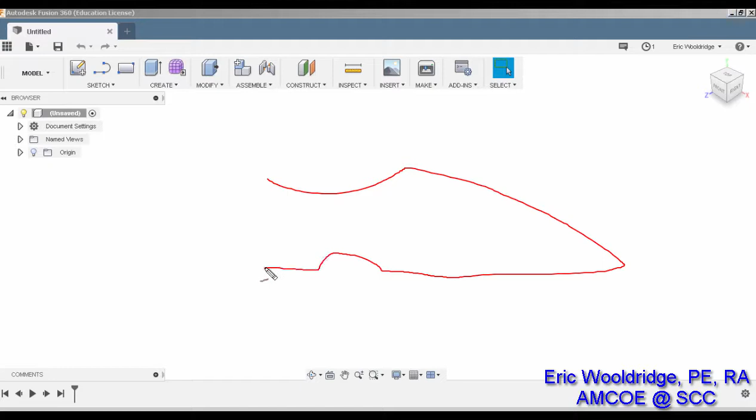Now we could try to scan it and that kind of thing, but I want to show you some tricks with the process and give you a feel, just in case you're having a hard time visualizing what I'm going for. If you just imagine, this is going to be a horrible example, but a lady's shoe kind of thing, a piece that we're probably more like that.

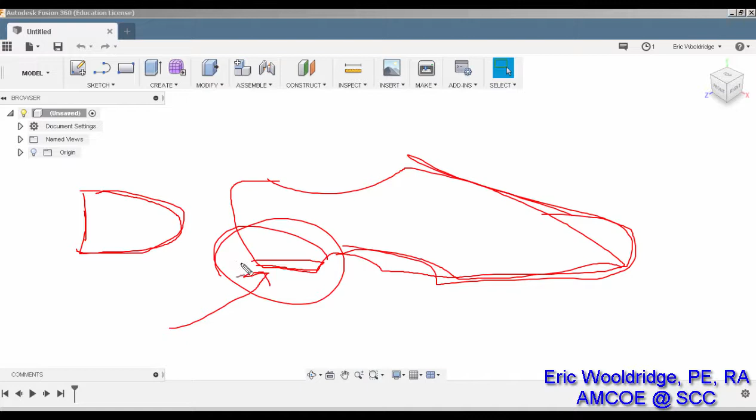I don't know, you know what I'm going for. Anyway, we're doing this right here. That's the piece that we need to replicate, and it looks like I've traced it out on a piece of paper. It looks kind of like this, with some thickness. So that's what we're going to make.

I'll hit escape there. The first thing we're going to do is start a sketch. Now I've traced over here, so I'm going to create my new sketch first, and I'll start with the top plane. I'm going to insert... let me see if I can just do a copy paste.

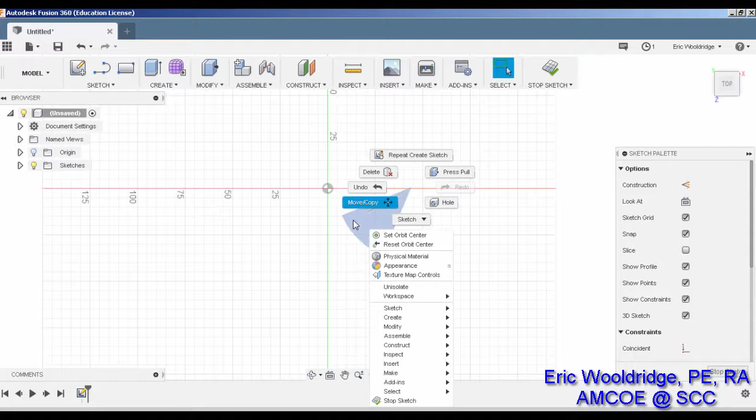No. I'll do insert instead. So let me insert the image in by going to insert, attach to canvas, selecting the face. It's going to be that face, and I'm going to select the image. Alright, got it selected. And now you can see the image right there.

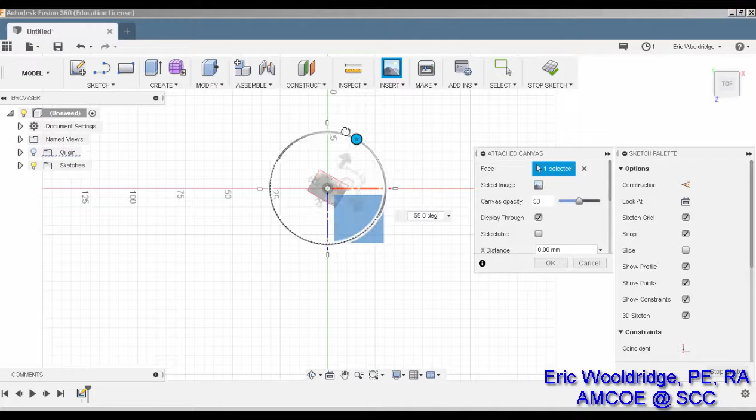I'm going to go ahead and rotate it because I want to draw it this way. And the question is scaling. So we'll zoom in first so you can see the image. I went ahead and took a measurement and drew a line that is this.

I don't want it being that hard to see. Alright, I drew a line from here to here, and I actually measured it with a digital caliper. It's 22.42 millimeters. So my objective is to scale this thing in such a way that that's a true version of that.

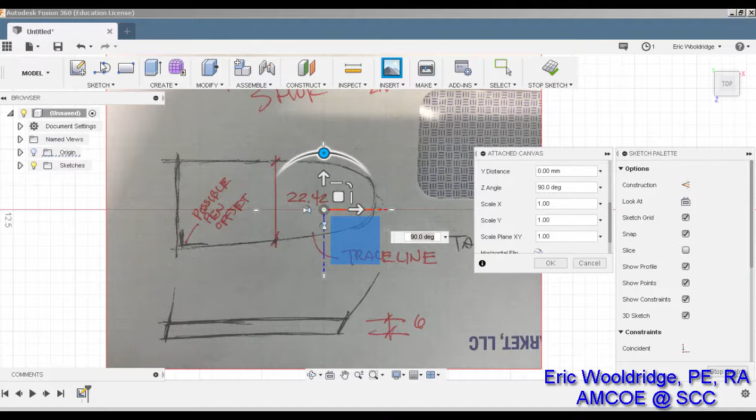And this is a little bit of the trickier part, figuring out what kind of scale factor we're going to have. So first thing I'm going to do is come over here and draw a line that is in fact 22.42.

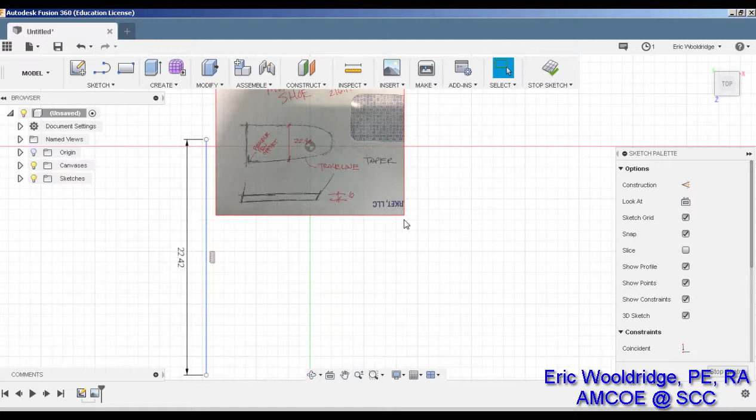And to do that, of course, I lost my line there. To do that, we have to go back to edit feature. So let me click that off for a second. To reorient this, it's not going to give you a lot of options by clicking on it, but you can go down to the picture itself, the canvas, right click and say edit feature, and there you go.

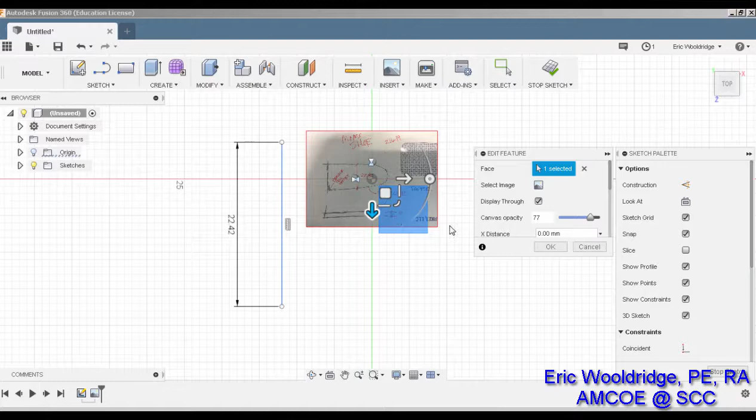So I could keep working on it a little bit. This is your scaling ability right here. And I could get in the ballpark. I am going to kind of drag it, and our objective is to scale it in such a way that line matches up with that other line.

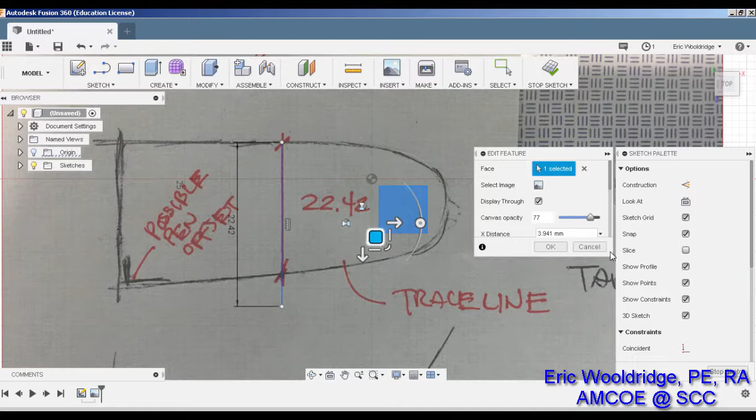It's not an exact science. We can probably get pretty close. We can see as we do this process that... let's see if it's adjusting my scale factors for me. Nah, not much. Keep going.

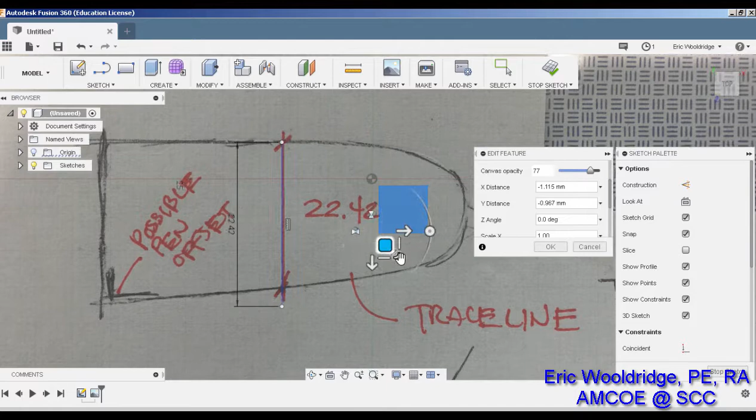You can see I'm really close now. Let's go just a hair back. I'm going to get as close as I can. I probably can get this manually fairly close.

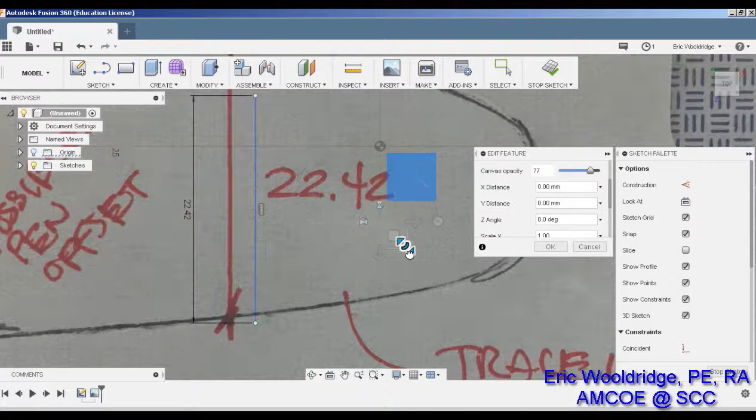That's really close right there. See that? My line is about the same length as that, so that's a quick way to scale it. Now if I knew a real scale factor I could type that in and be done, but this is the quick way I found to do it, and it's the right size.

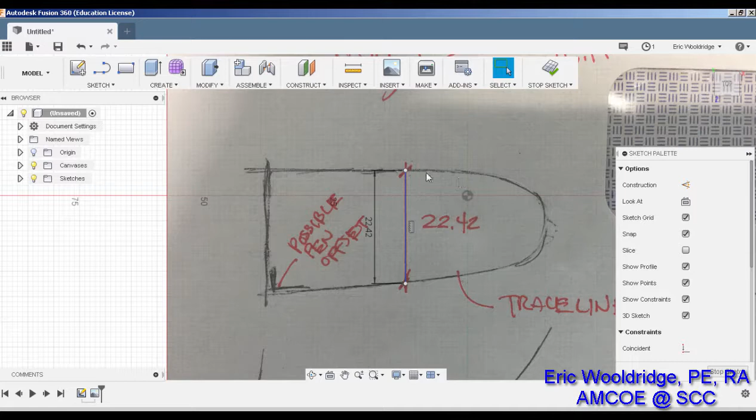So now that I have it scaled to the true size of what the image shows, my next step is just to trace this particular feature. I can do this with a combination of tools, but I've got to watch my grids, since they'll interfere with this process if I'm not careful.

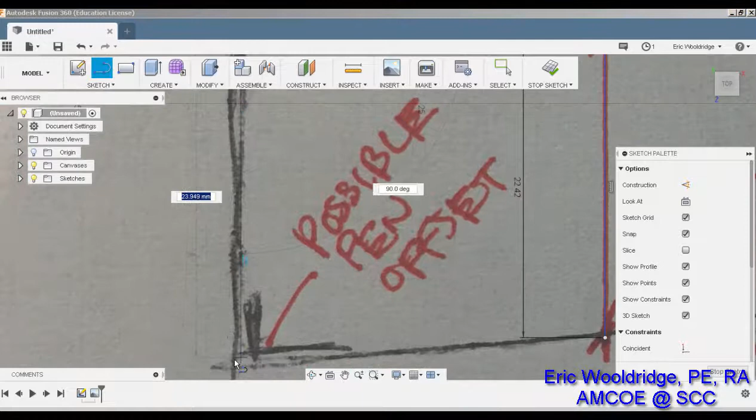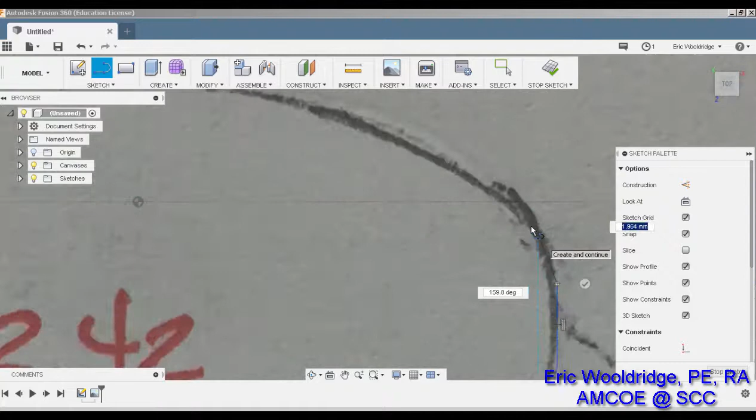And this isn't going to be an exact science in recreating this either. We're going to use some lines to make this work, and I have to click carefully and slowly, making sure I'm watching my curves. I could have used an arc here, but honestly if you just draw small enough, you'll create the curvature you need.

Close it. And there's the shape. Now I will note this.

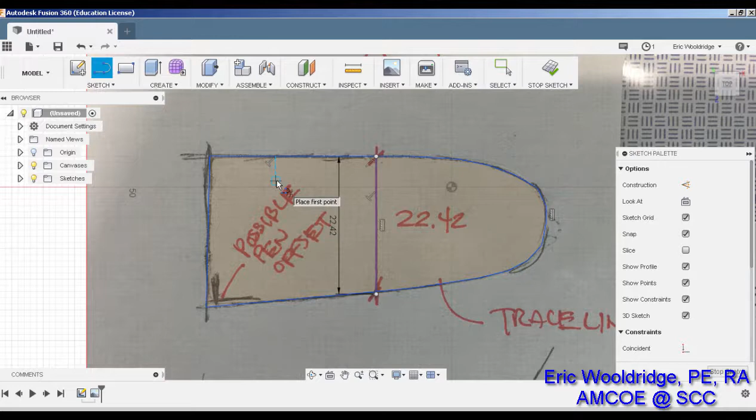See this image right here? It's noting the fact that when I was marking or tracing this with a pen, there's a slight pen offset. So I made a note to myself that this might be the actual pen offset, and I'm going to work with that, assuming I'm probably slightly off.

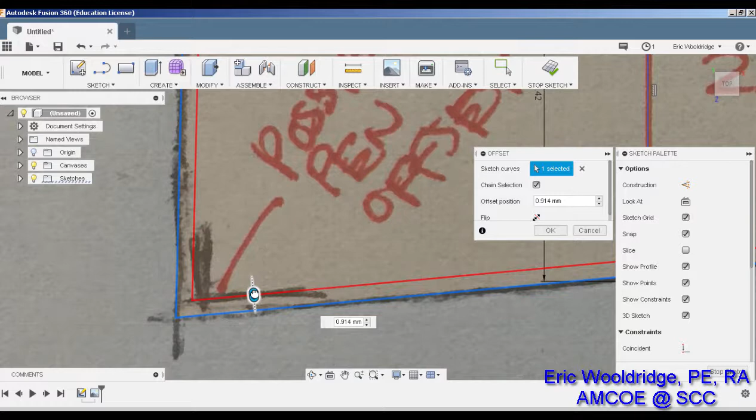So because of the pen's size, I'll hit offset, click my edge, and pull it in until it's about lining up with that. That's pretty close. There's no perfection here because we're just recreating an object based on what we have—it doesn't have to be perfect.

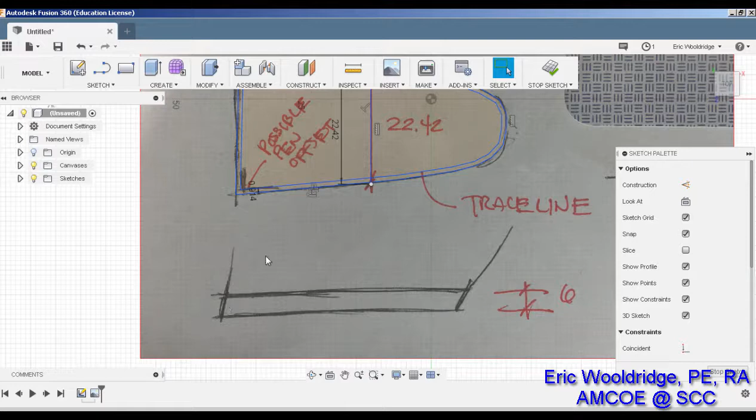So anyway, I now have my extrusion. You'll notice in the sketch I point out that this thing is going to be about 6 millimeters tall, and it's slightly tapered—it's going to taper uphill a little bit too. So I may have to account for that as well, but we'll see.

Let's try it first. I'm going to hit stop sketch, hit create, click the inside zone, choose new body, and we're going to select a taper. We want it to flare out, so I'll do like a -15 with a distance of 6. Let's see how that's starting to look.

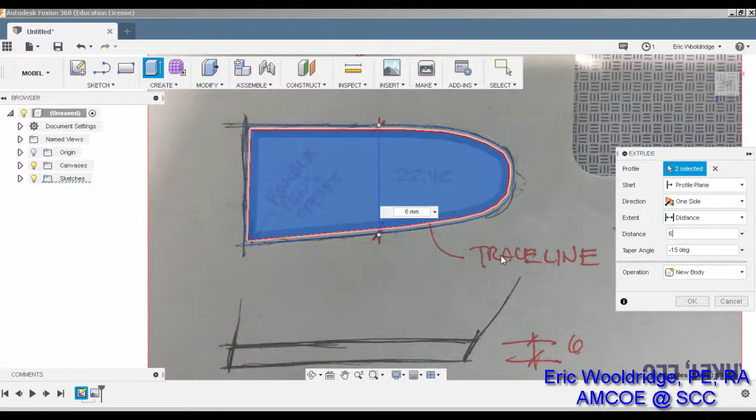Maybe I need to go the other direction—plus 15—and it's got a little bit of flare to it. That's not too bad. Let me look at it that way.

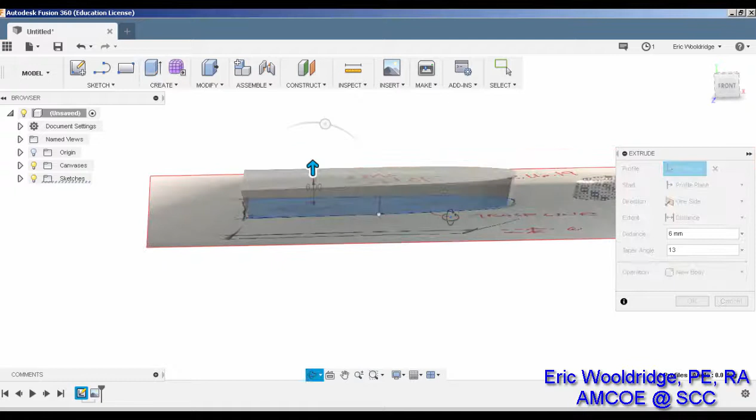I may play it even safer. I could taper it a little bit less by changing it down to 13. Still got a little bit of taper, not bad. So you can see what that taper does—as it extrudes, it tapers it out or tapers it in.

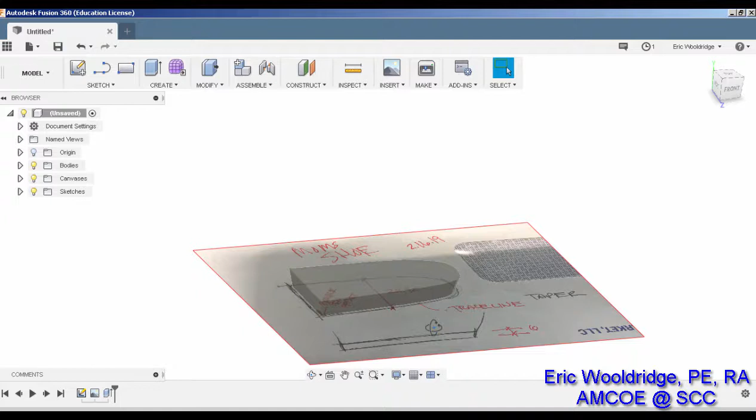I hit OK, and my feature is now made. Just like that, I've used the technology to recreate something that was custom. If I do some slicing, I'll have to make sure I fill this up correctly with infill or solid perimeters, because it's going to be a pretty durable feature. But with those two little steps, I've recreated a part to make Mama happy.